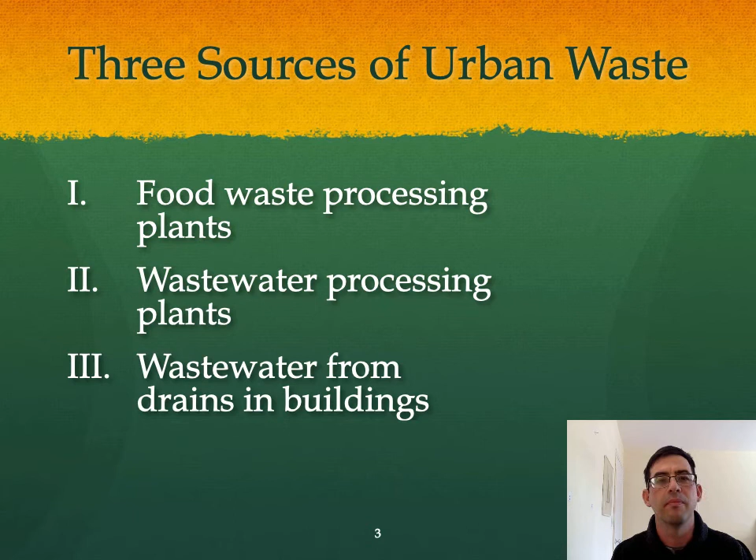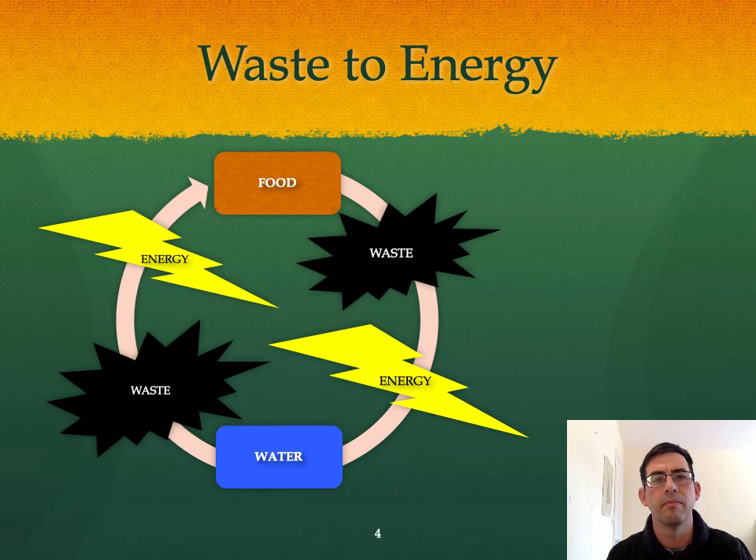To remain sustainable, cities must address the way they process waste, and find ways to recover energy hidden in the waste. First, I'm going to explain how we can recover energy from food waste. In the US, 126 billion pounds of food are sent to the landfills, which include 52 billion pounds from manufacturers, grocery stores, and restaurants, and 54 billion pounds from homes. An additional 20 billion pounds of fresh produce are discarded on farms or left in the fields.

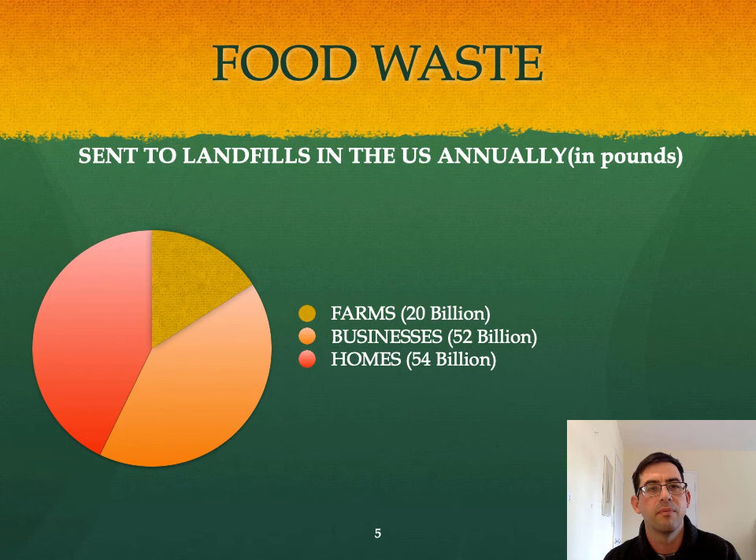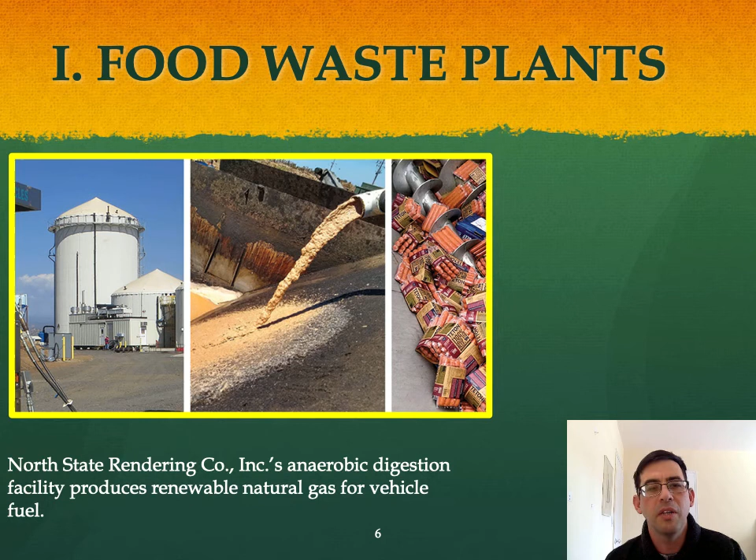The solution is in biogas processing plants, which convert organic materials into biogas using large anaerobic digestion tanks. The byproducts of the process are renewable fuel and nutrient-rich soil fertilizers. In conclusion, converting food waste into energy through biogas systems reduces fossil fuel usage and greenhouse gas emissions. It gives a second use to resources that were put into the food cycle.

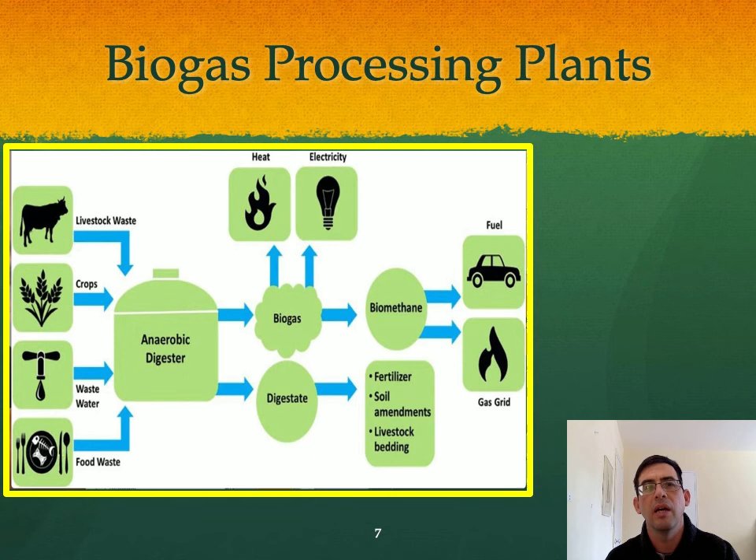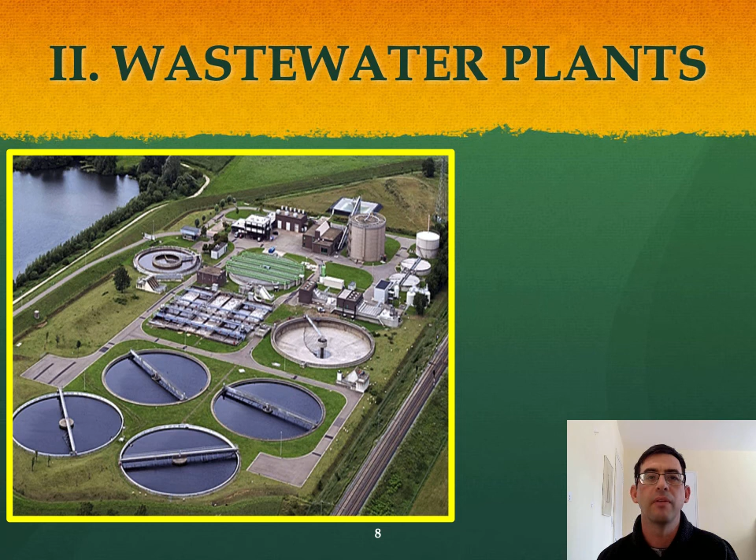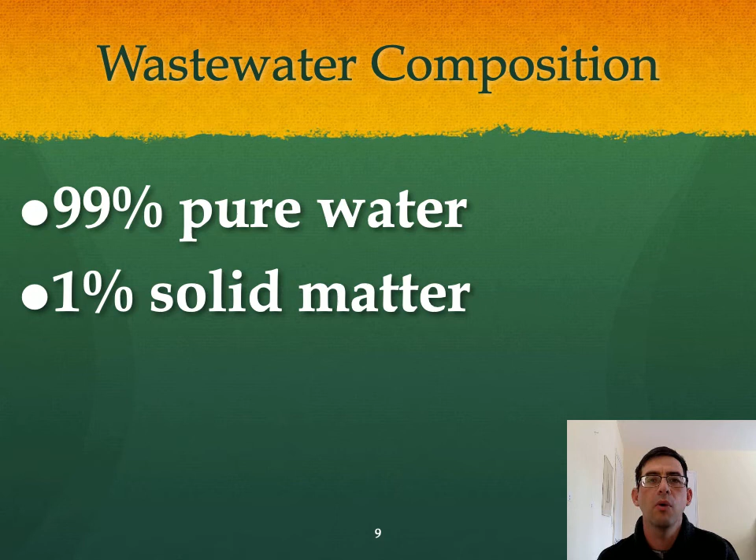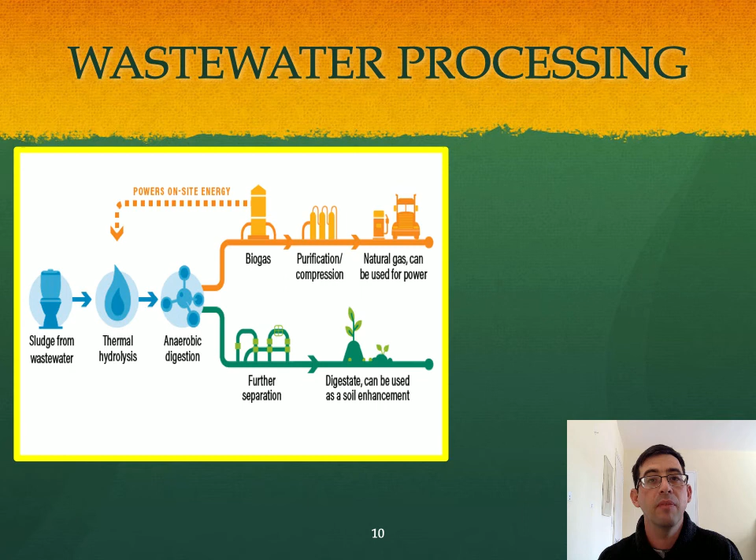Wastewater is 99% pure water and 1% waste, primarily in the form of organic matter and nutrients. Sludge is the 1% solid waste remaining after refining the water. Scum is a floating material on the surface of the wastewater, typically fats, which can clog wastewater treatment systems. Sludge processed in the water treatment plant can produce energy used to run the plant, and can even reduce energy consumption to net zero.

How is this achieved? Sludge from wastewater is equivalent to food waste, and is processed the same way. Beneficial byproducts of wastewater processing include: 1. Heat released from sludge to produce hot water, steam, or hot air. 2. Methane gas from sludge, which is consumed as fuel instead of being released into the atmosphere. 3. Water from the process is suitable for crop irrigation. And 4. The collected scum can be added to the mixture in the biodigester to improve performance.

In conclusion, water treatment plants are large consumers of electricity, but by exploiting the byproducts from the wastewater treatment, for example, reusing the gas, solids, fat, water, heat, these plants can be net zero energy consumers or even earn revenues by creating and selling excess electricity.

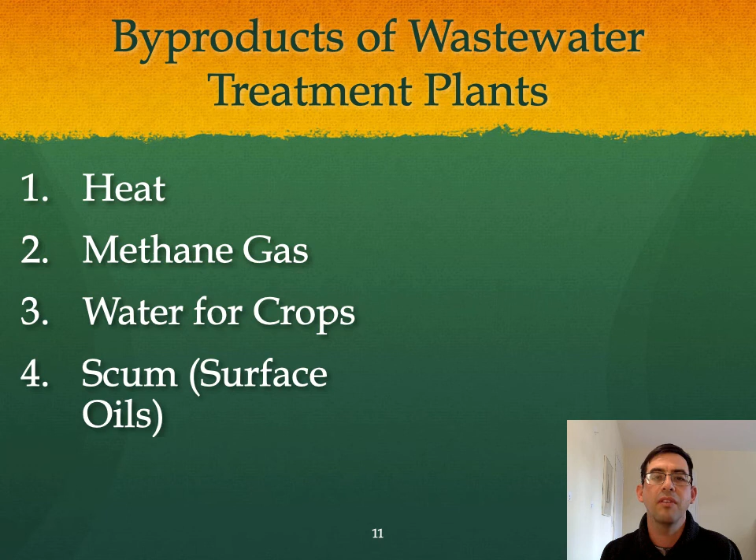Finally, I will explain how energy can be recovered from wastewater in buildings. Urban water distribution systems require enormous amounts of energy to deliver and heat water for use in homes and offices. That energy literally goes down the drain once it's used. How can we capture and reuse this wasted energy? 1. We can use heat exchangers to draw the heat from the wastewater. 2. We can also use the kinetic energy from wastewater flowing down the drains and pipes.

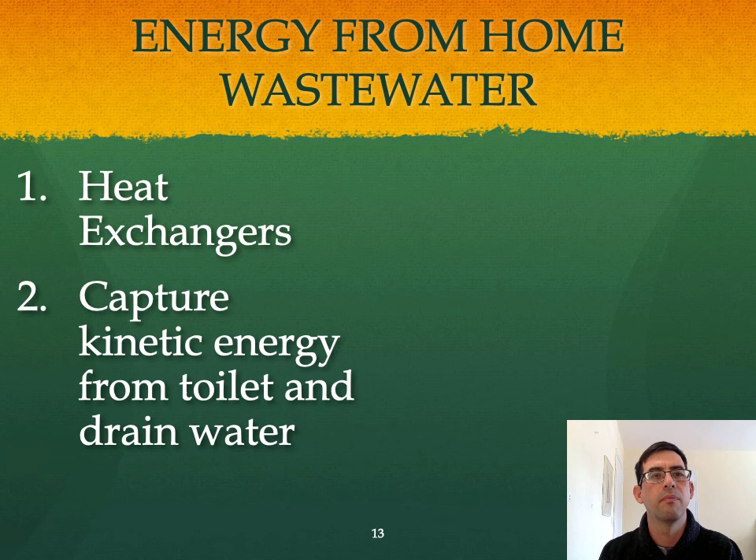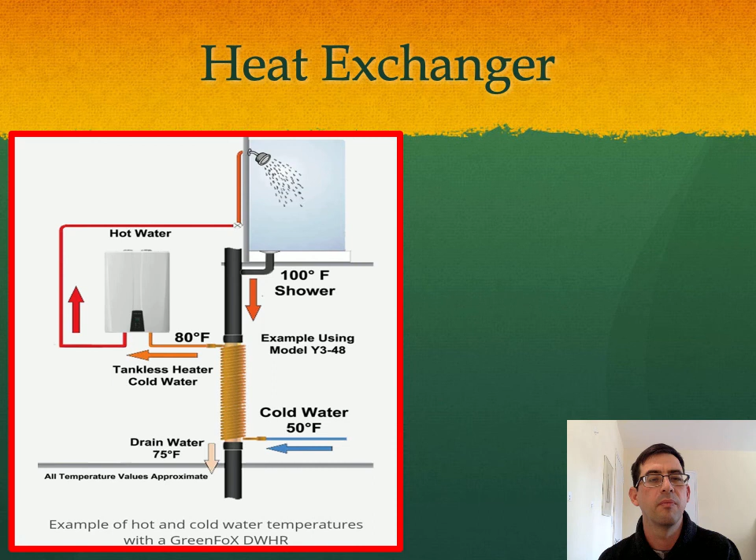A heat exchanger is a system used to transfer heat between two fluids, which are typically separated by a barrier to prevent mixing. The heat exchanger can be installed on the drain line to draw heat from the warmed wastewater, for example, from showers, dishwashers, and washing machines. The warmed wastewater raises the temperature of the cold water passing through the heat exchangers on the way to the boilers. As a result, less energy is needed to heat the water in the boiler.

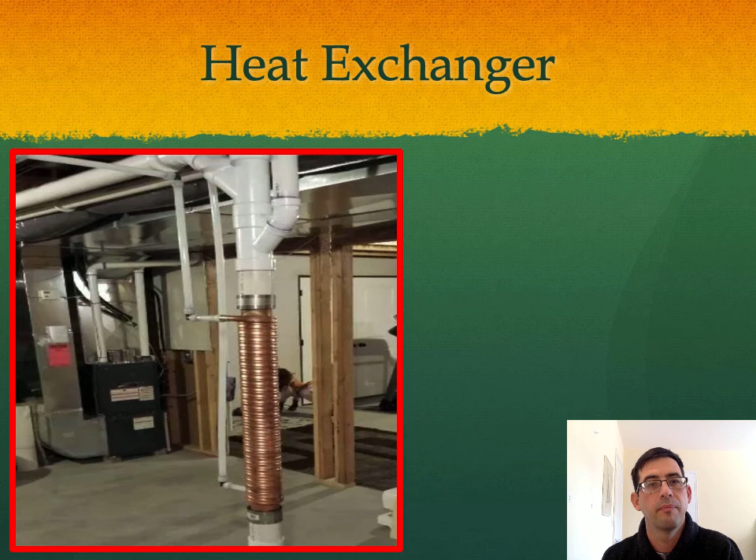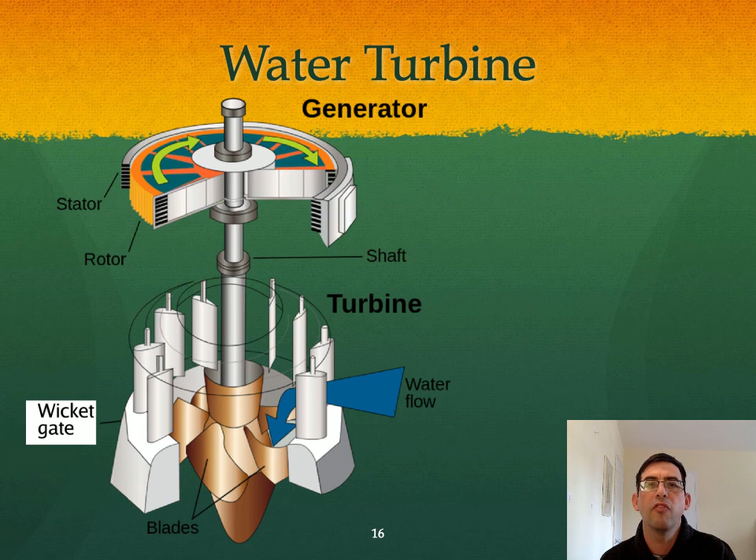The second solution uses an electrical turbine to convert flowing water to electricity. The turbine harnesses kinetic energy from water flowing down flush toilets or shower drains. In high-rise buildings, energy is needed to elevate water from the ground level to the floors above. Kinetic energy from every flush or shower we take can be retrieved to move this water throughout the building.

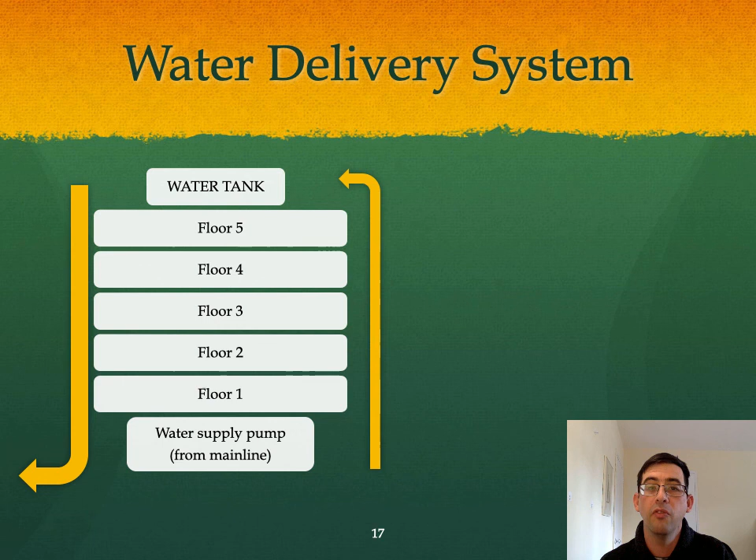Imagine a 100-meter building. One person uses 14,000 liters of water per year to flush the toilet, which requires 14 million joules of energy to lift the water to the roof tank. Recapturing part of this energy from flushed toilet water reduces the additional energy needed to pump water to the roof. Through these examples, we see that recapturing even a portion of the building's waste energy using heat exchangers or turbines can significantly offset the energy needs of a building.

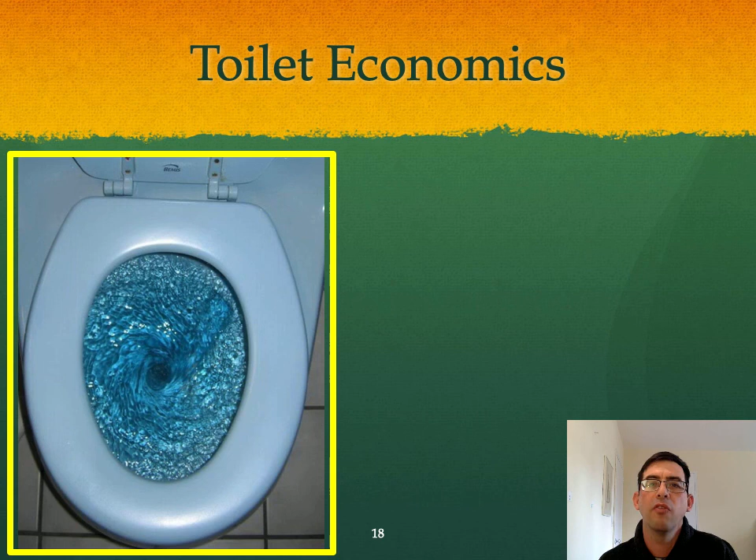In conclusion, we know that sustainable materials management is important in cities. It should be based on reducing the energy used and recovering energy from waste. Cities are starting to recognize the value of utilizing wastewater for energy. Finally, new technologies will continue to emerge to capture this valuable energy hidden in our waste.